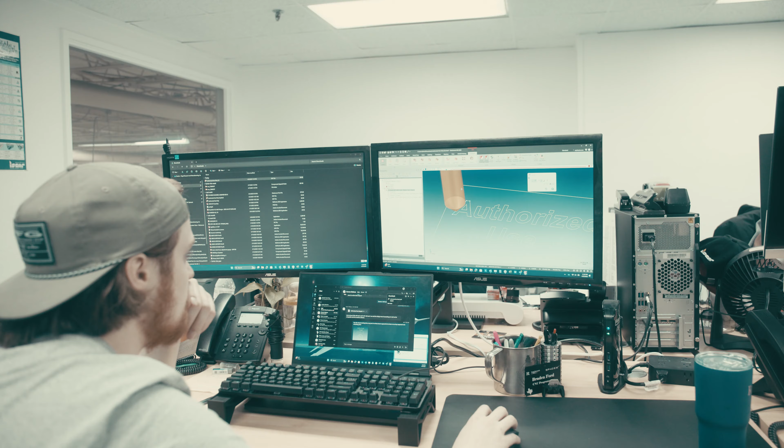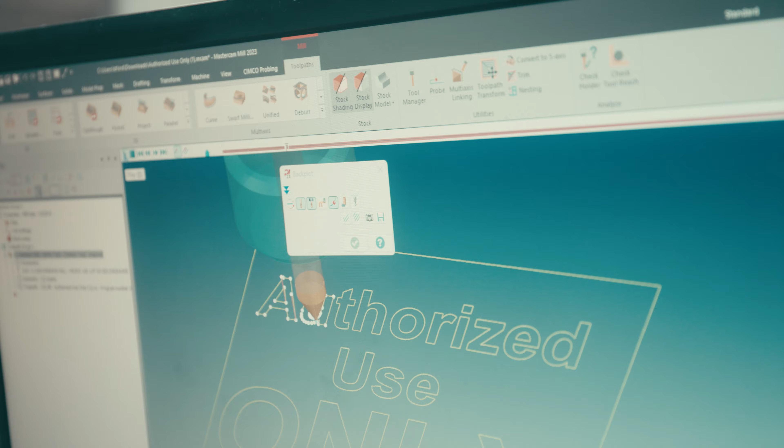It's a matter of what diameter tool I can fit in there. I was measuring the width of the letters so I can get a good idea of what size tool I can fit in there. So this one has a 45-degree tip on it. Use the 45-degree engraver, and just do the outline. We could do a really deep outline, and that would give us a good sharp corner. And got these three letters pretty good.

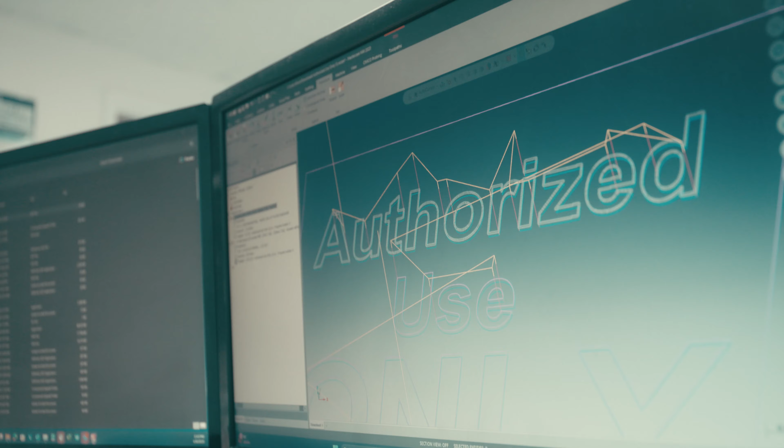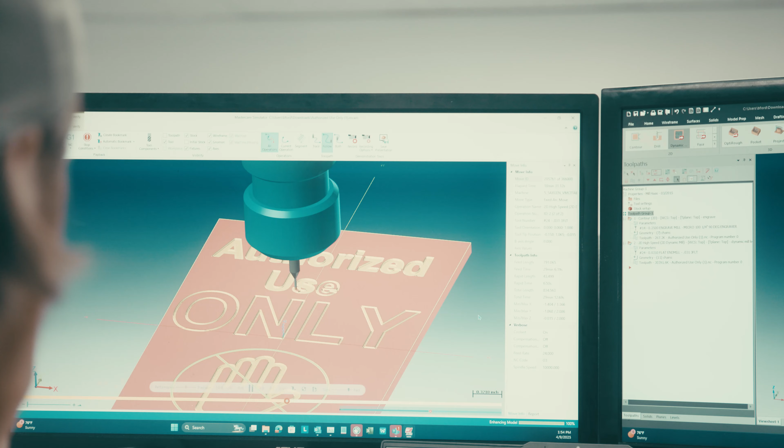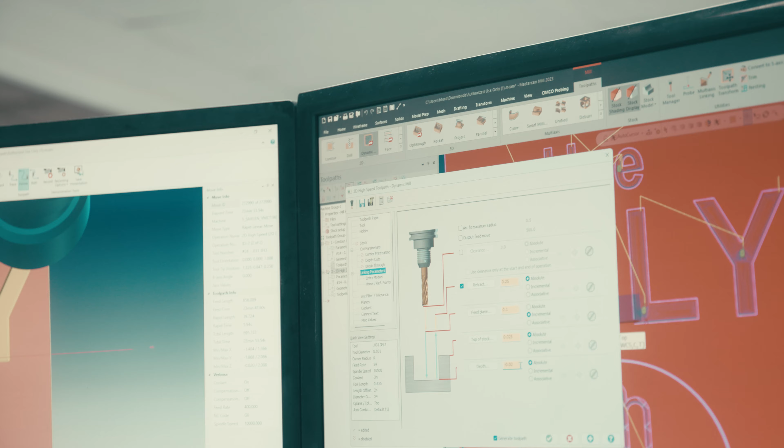You can run this through, it's called Verify. It pulls up a separate window that runs a machine simulation with the tools and the material and everything. I think I'm gonna shorten up the depth, go 10, see how that looks. There we go. So that's 10 thousandths deep.

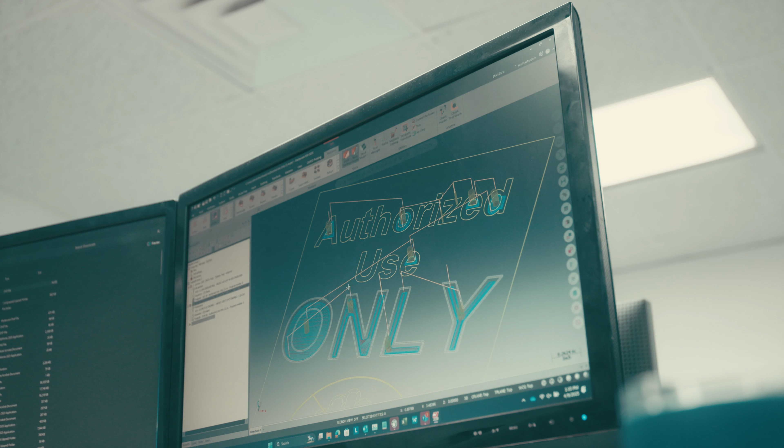Looks like nothing's touching. I took that DXF and essentially just fitted it onto our theoretical piece of material and used a 45-degree engraving tool to contour all the lettering and the images, and took a 31 thousandths end mill to pocket everything out. Yeah, that is our tool.

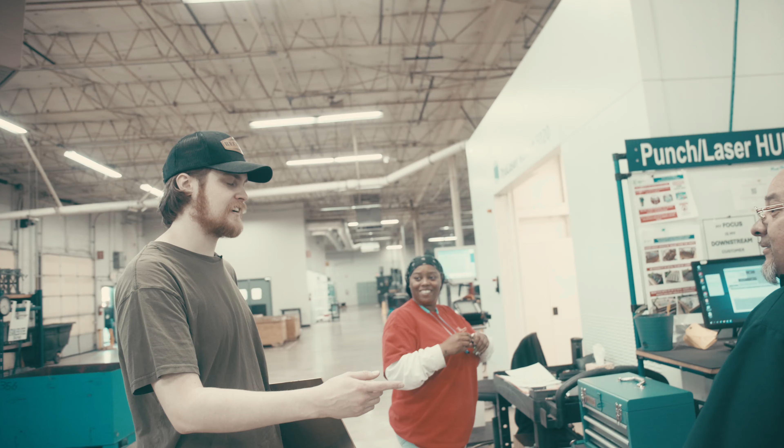We have to get the plates cut to size. Oh, there's our man right there. I got a favor I need to ask you. Can you shear this guy for me? Awesome. Thank you, sir. All right. Very much appreciated. All right, thank you.

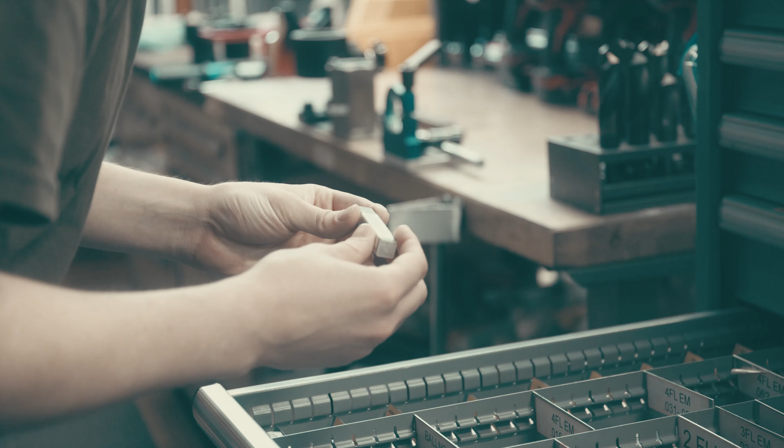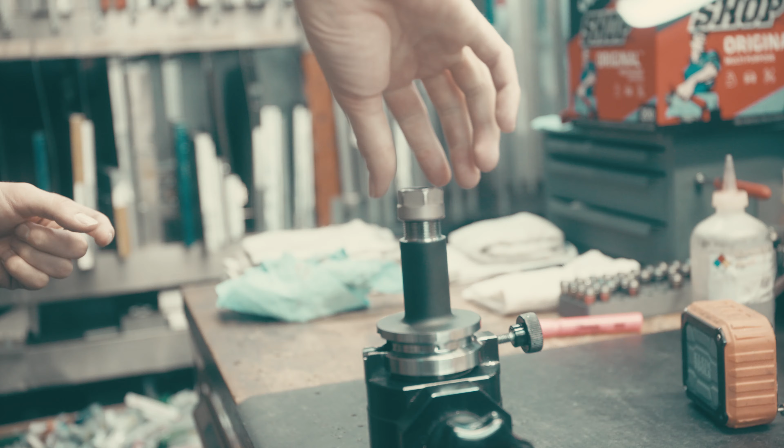We need to find a couple of tools and get them tooled up. Looking for a 031 diameter, 46 length of cut. Find a collet for it. There we go. That is one ready to go. Set that right there. We need our engraver next. I think we should have one in here. This is a 1/8 by 90-degree engraver that we're going to use.

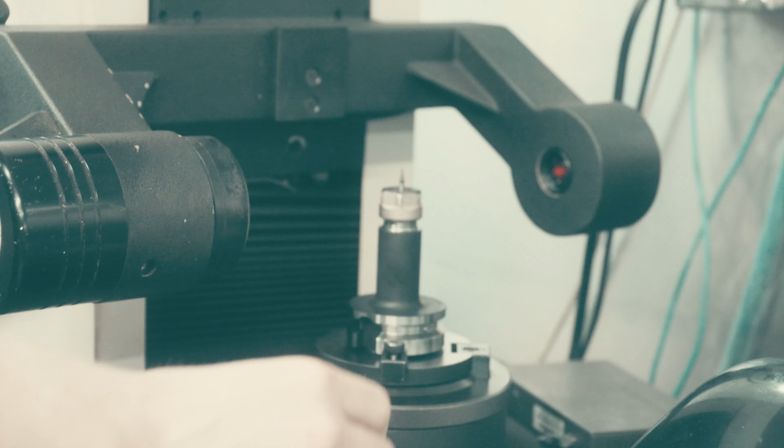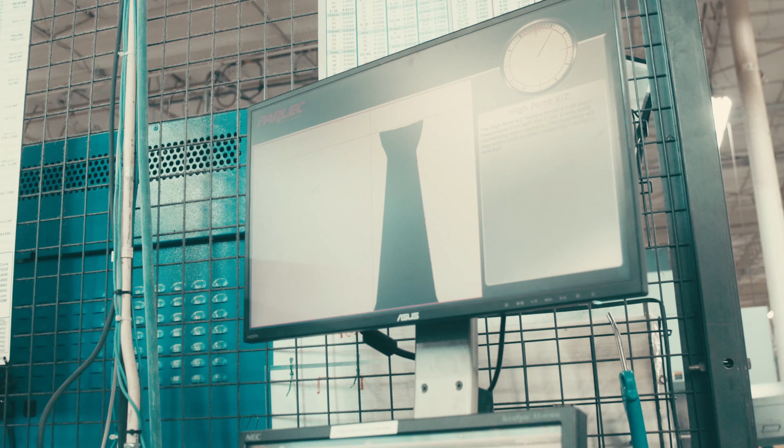All right. I think those are the only two tools that we're gonna need. The last one should already be loaded in the machine. So this right here is our height offset measuring machine. It basically just gives us a Z and X coordinate based off of our machine tools, machine connection taper. And that's how tall our tool is right now, that Z. All right, let's go back.

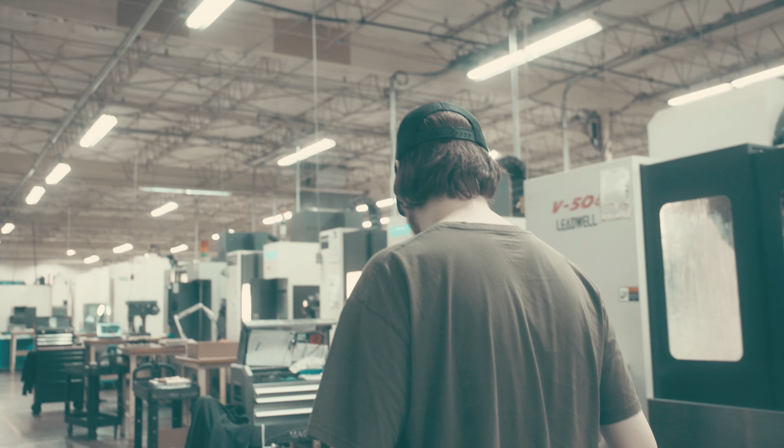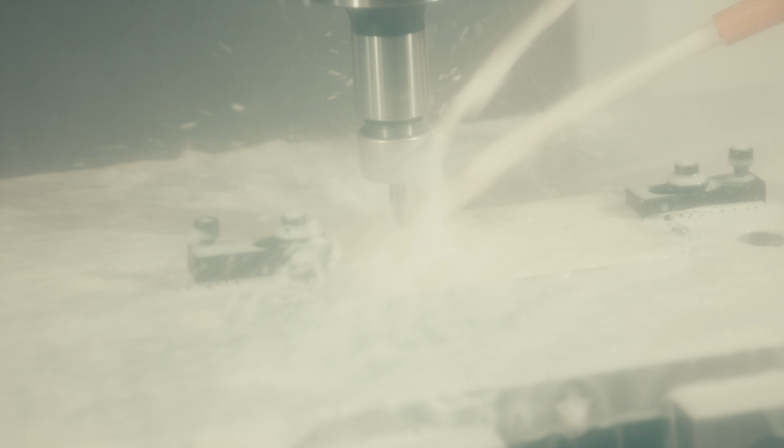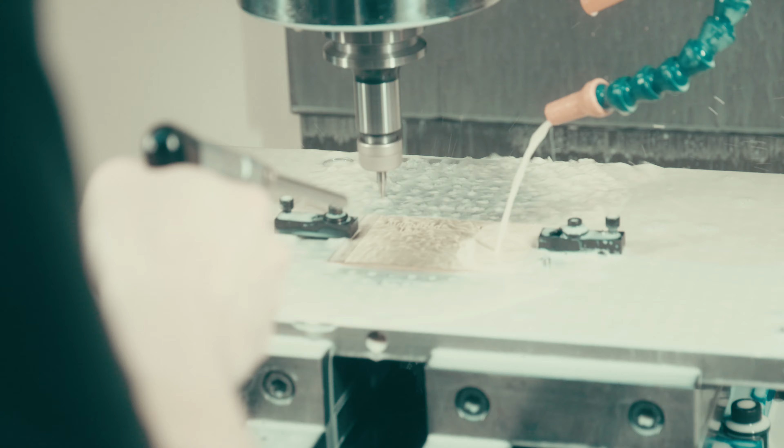Let's hit it. I think it's probably going to be about an hour, all things go well. Stop it for just a second. See where we're at. It's actually looking pretty good. Ready to go.

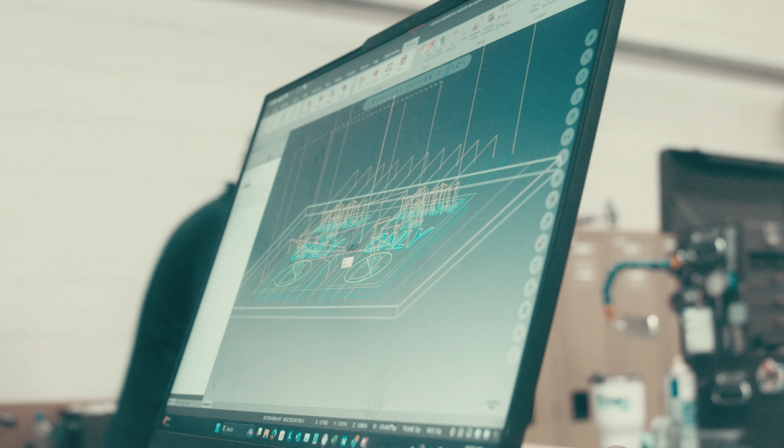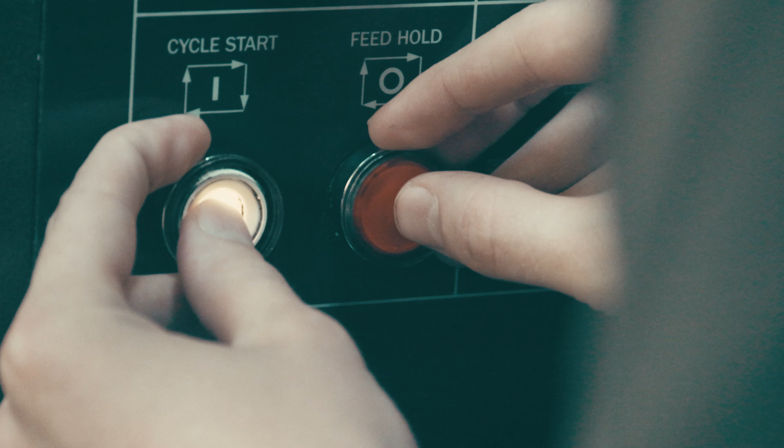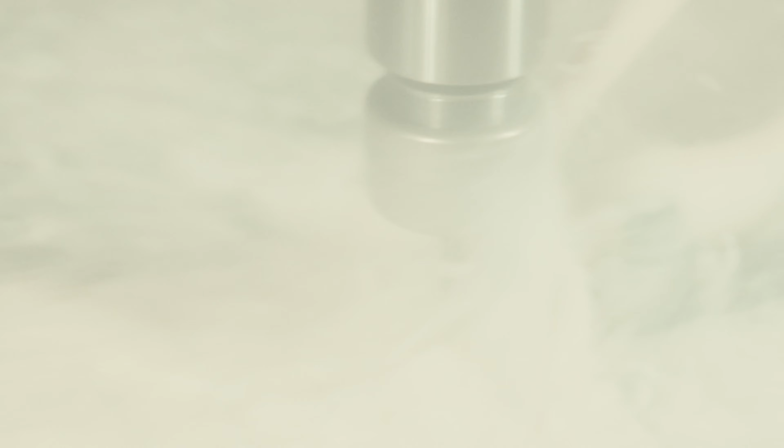Oh, there's one more thing it has to do. It needs to put that circle with the cross in it. Let's go ahead and finish the engraving. Looks really good. I'm gonna go ahead and clean that face up again, and we'll cut the parts out. All right, that's the end of our program.

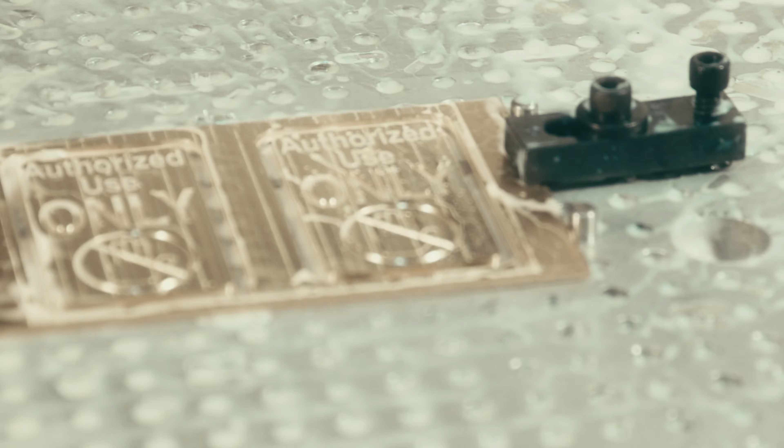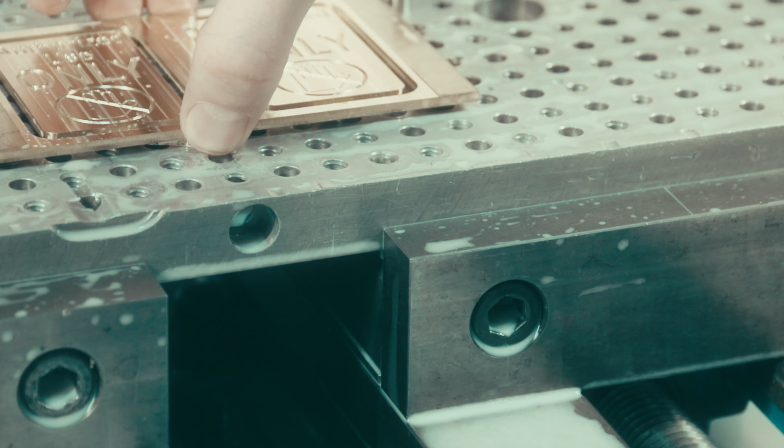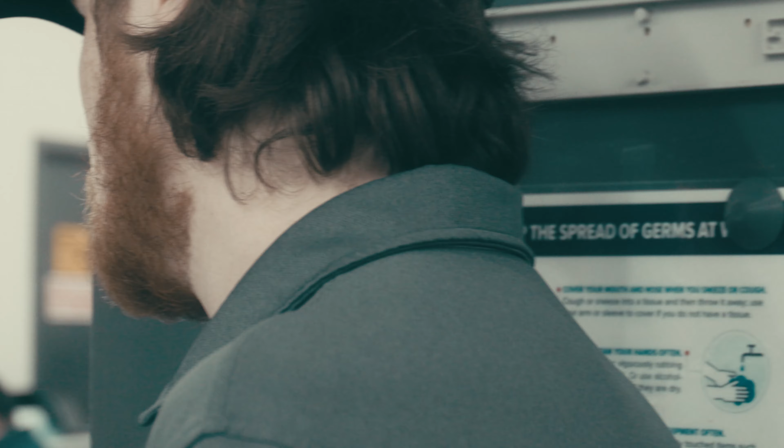All right, there it is. That ink fill is gonna look good on this. Head on over to Ramon. Hey, you gonna have a minute? We have 2 new signs.